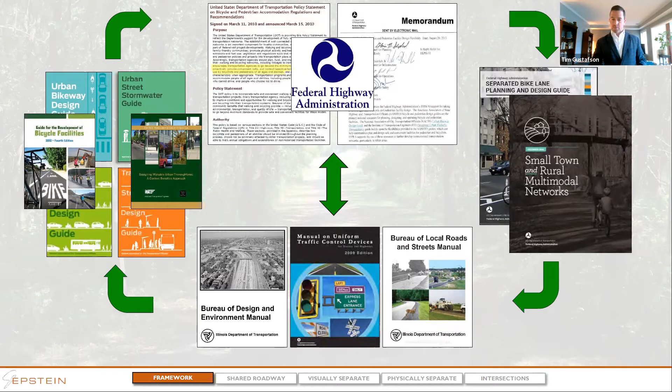So I want you to feel that after today's presentation, you know which guides are out there and how they're all relating to one another. Now I'd like to move on to some IDOT specific policy, which gets you a little bit deeper into the guidance to talk about where do we even start when it comes to selecting a facility.

For those of you who have cracked open these manuals, I hope many of you are at least curious, I use these all the time. I'm opening them probably 3 to 5 times a week. You'll see that the location of the facility guidance is in 2 different locations depending on which guide you're using. If you're looking in the BDE manual, you'll find this in chapter 17. And if you're looking in Local Roads and Streets, you'll find it in chapter 42.

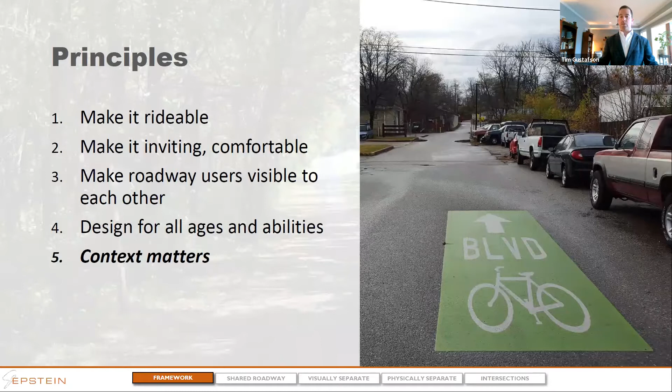The final principle is that it's really important to understand the context in which you are operating. Context is a very important consideration because different bicyclists and roadway users approach the network differently based on how confident they are, how enthused they are, and what their age and familiarity with the roadway happens to be.

For those of you in the engineering world, you may have heard of level of service, which rates roadways and intersections based on delay and capacity. Level of traffic stress is a different mechanism that rates the roadway from the perspective of the bicyclist, based on how comfortable they may be.

These factors can be used to calculate and estimate a level of traffic stress that rates roadways on a scale of 1 to 4. Level of traffic stress 1 is our lowest stress - think of a cul-de-sac in a very quiet neighborhood, a trail that's nice and easy for everyone to ride on, and even some protected bicycle facilities where you'd feel comfortable riding with your family. Levels 2 and 3 are next.

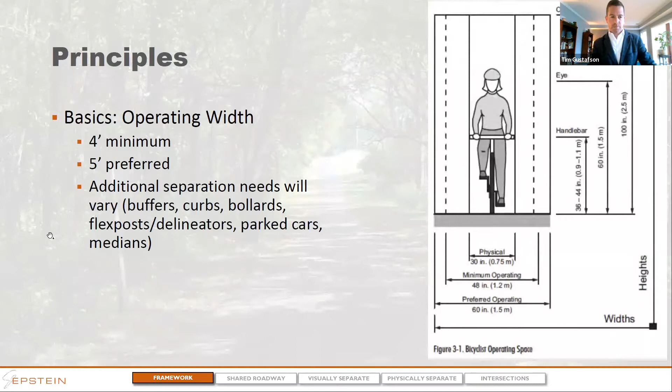When you have a little bit higher speeds or volumes, it actually makes sense to dedicate some exclusive space. That's where you start to see bike lanes or buffers entered into the conversation, because maybe just a little bit of visual separation is really all you need, and then the roadway just works better for everybody. And then obviously when speeds and volumes are higher, or when you're alongside of a highway, for example, you really do need that physical separation. That's when you introduce a curb or a vertical element to physically separate users from one another.

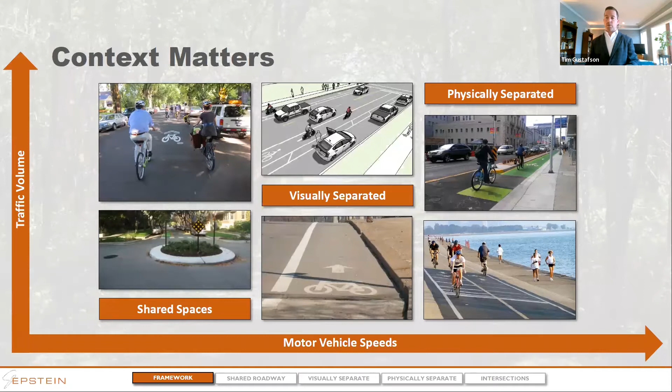So does anybody have any questions on what those 3 groups are before I go on to this? We've got shared roadway spaces, visually separated spaces, and physically separated spaces. And as you'll see at the bottom of the screen, you can tell which section we're in based on which element is highlighted. Okay, seeing no Q&A, I'm going to move on.

Our first group is shared roadway environments. So we have 4 that we're going to get into, and I'm going to define each of these for you, and you may be familiar with most of them already.

The first is a signed bike route. This is probably your most basic roadway treatment. Any roadway, unless we've specifically prohibited bicyclists from entering, like an interstate, legally can accommodate bicyclists. But context matters, and if we want people to feel comfortable and visible, we need to do things to make that happen.

One of the first low-level things you can do is identify the bike route. There are a couple of different ways to do this. These generally work well on roads at or below 25 miles an hour with average daily traffic of 1,000 vehicles or less. I'd even say you could get away with it on roads with 2,500 vehicles or less, depending on speed. This formalizes the presence of bicyclists in the roadway, so they know the best way to get to a destination using these low stress, low speed, low volume roads.

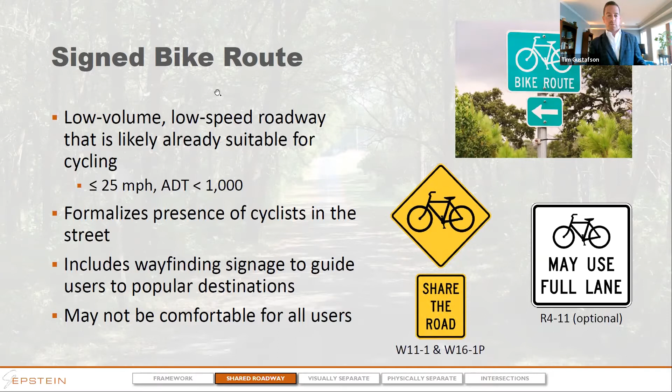However, signed bike routes are not super comfortable for everybody. You wouldn't necessarily feel comfortable going on a family bike ride if all you had was a shared roadway. So the next level up is installing a bit more guidance on the roadway, known as the marked shared lane.

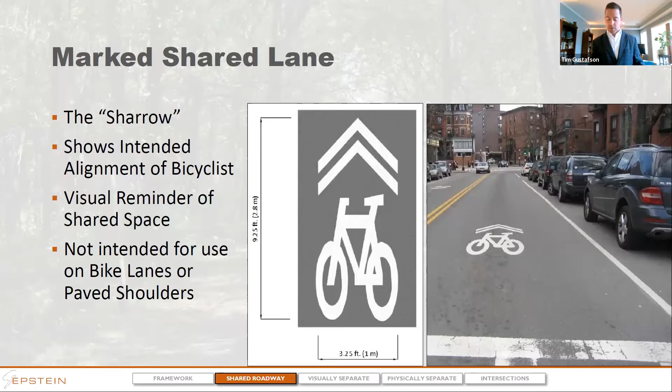Here's some additional guidance on placement. Generally, you place the shared lane marking 4 feet from the face of curb on a roadway with no on-street parking, or 11 feet from face of curb where there is. AASHTO, the BDE, and local roads guidance occasionally send you to AASHTO for further direction.

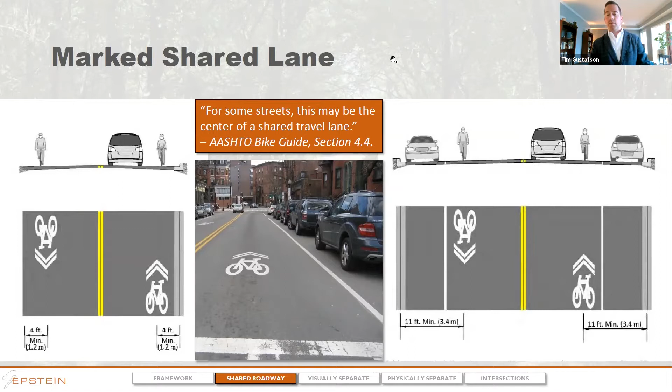AASHTO even states that on some streets, it's recommended to place the sharrow in the middle of the lane, especially in a tight section with on-street parking—you want to get the bicyclist out of the door zone and claim the roadway for that stretch. I've worked on a project with roadways where we couldn't place it 4 feet from face of curb or edge of pavement, and IDOT said center placement is probably recommended because it's more visible. So there are conditions where placing the marking in the center of the lane is not only logical but actually recommended by AASHTO.

The next level up from that is known as the bike boulevard. The bike boulevard isn't necessarily one specific treatment, but rather a connection of treatments. It takes the concept of a signed route and elevates it by pairing it with traffic calming and pavement markings to stitch together a network that is low stress, gets you to your destinations, and provides the added comfort and visibility we want on our bicycle networks.

We can even incorporate some regulatory signage to close off certain stretches of a network to make sure that bicyclists may be able to continue through along with pedestrians, but it doesn't necessarily turn into a raceway for motors.

So as I mentioned, this is a couple of treatments, but it's intended to be a roadway that prioritizes bicycle traffic. It does so by using traffic calming techniques to keep motor speeds and volumes below a certain threshold. Generally we like this to be below 3,000 cars a day, and at or below 25 miles per hour. If you can get it even lower, it's preferred.

These are great because they often can be built alongside or within a reasonable distance of an otherwise direct but very stressful and busy route. This helps you maintain your connectivity without having to go to bat or have a huge fight over a roadway that's already very full, very fast, very congested, and where you don't necessarily feel comfortable introducing bicyclists into that mix.

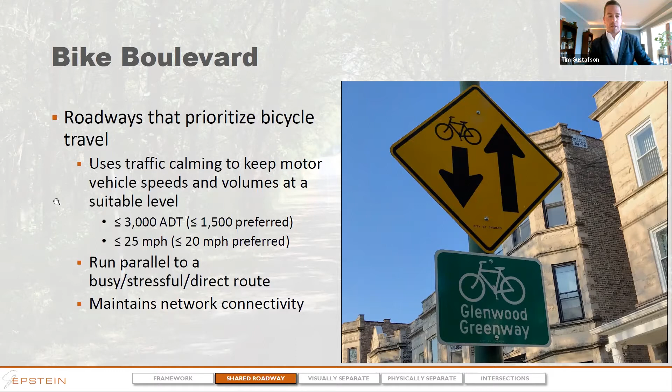Hey Tim, do you have recommended traffic calming measures that might be better than some others? Or, when you're designing these, for instance, a lot of times for neighborhood traffic calming people use things like speed tables. But for a bicyclist, how would you modify that to be as bike friendly as possible in the implementation?

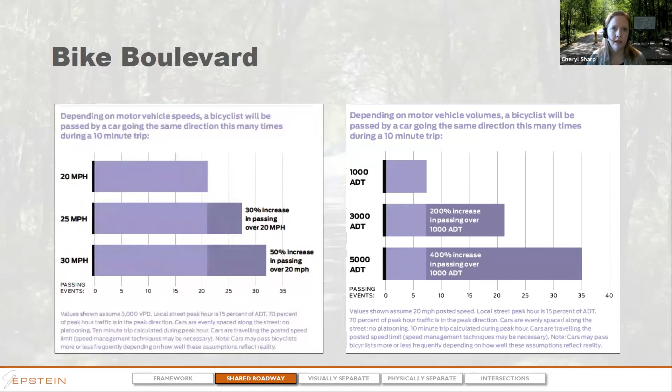That's a great question, and it actually has come up a lot. We had a recent project where we took the toolbox to the community and said, here's what all of these things do. Which ones do you like? Which ones don't you like and why?

What we found is that generally pavement markings are pretty readily accepted. People kind of get that they're helpful. Signage is really helpful too. There are some traffic calming techniques that are more popular than others.

Miniature traffic circles, which are literally only about 11 to 18 feet in diameter in the intersection at two intersecting residential streets, are a little bit more accepted and quite popular here in Chicago because they don't impose any kind of flow or speed restriction other than making you shift laterally to go through an intersection. So it slows you down a little bit, but it doesn't damage your car, unless you smack right into the thing.

What I will say is people generally don't like speed humps and tables. They complain that garbage trucks don't like them, ambulances don't like them, and motorists who want to go above 25 miles an hour don't like them because they're really effective, but they're also kind of hard to swallow.

So that's a situation where if you truly feel you need to reduce speeds, there's a newer design known as a sinusoidal hump. If you're going over it at the speed you should be, bicyclists can do it, motorists can do it, and it doesn't work against you. But if you go above a certain speed, it's kind of an auto-punishment situation where you really brought it on yourself.

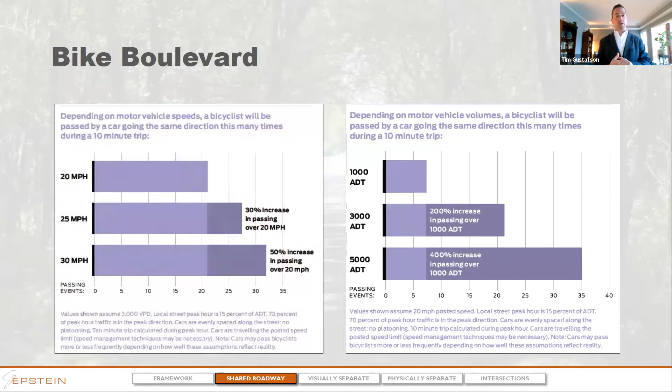If there's an increase in passing, the number of times a motorist overtakes you or the speed at which they do so contributes to that stress level. Stress levels start to go back up above these thresholds, and you can see an increase in the number of passing events or the speed at which that passing occurs based on that increase in posted speed or ADT. NACTO's website has a great module on bike boulevards specifically and goes into a lot of the data behind why we recommend certain speeds and treatments and what the benefits can be.

Generally, as Cheryl alluded to, there's a couple of different things you can do in a bike boulevard. You can either regulate speed, regulate volume, or do things that do both. Here's a couple of examples.

Sometimes just reducing lane widths will help calm traffic. If you calm traffic and reduce speeds where it's shared, that might work in your favor rather than giving space to bicyclists by making the roadway wider. Sometimes it's not feasible to widen your roadway. So as I mentioned before, a speed hump or table, a miniature traffic circle, a curb extension, or introducing an island into the roadway so cars split around both sides, slows everybody down. Those are some speed treatments you can use.

Let's say you want to reduce the volume of traffic through a certain area. You can reconfigure the roadway lanes, for example. Sometimes it's known as a road diet, where you take 4 lanes, restripe, and now you have 3, room for a bike lane. It's not a bike boulevard treatment per se, but it's one type of treatment.

Adding or removing on-street parking is another option. I live on a street where 2 vehicles cannot comfortably pass one another because there's on-street parking on both sides. The City of Chicago prefers it that way. Otherwise, all of these roadways would have speeding problems.

Sometimes changing your signal timing so that if you're speeding, you're going to meet every red light, and you'll find out that's just not a desirable street to drive on. And sometimes putting in a cul-de-sac or diverter where bicyclists and pedestrians can go through, but cars cannot. That's a pretty typical and increasingly popular approach, especially if you're closing off a grid that's got more than enough alternatives.

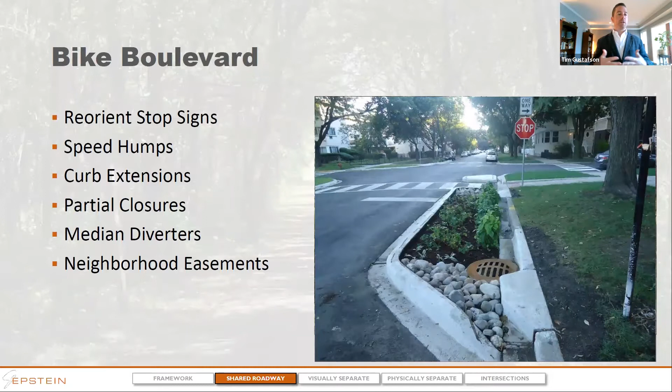Sometimes these are imposed in neighborhoods where flooding was more of a concern, and it just also happened to have a bike boulevard benefit. This is a situation in Chicago, but we've also worked in a city in Wisconsin where they had a stormwater utility ordinance and needed to reduce stormwater. They decided to put their bike boulevard network into that concept, with the city engineer working on the stormwater side as well as the bike plan side, getting these projects to work together.

So that was the introduction to the bike boulevard. Now I want to move on to a topic that's a little bit newer, relatively recent, only added since the Federal Highway Administration released its Small Town and Rural Multimodal Networks Guide, and recently added as an experimental treatment per the MUTCD. It's known as the advisory bike lane, the advisory shoulder, or the dash bike lane. I'll admit the reason it's still experimental is because there's still not even consensus on what we're supposed to call it based on how it's being used.

Generally, this is a situation where you don't have enough room on the roadway for an exclusive bike lane, or you still need a shoulder because you're dealing with a rural roadway and have breakdowns and other curbside uses that require a shoulder. You can't exclusively sign it as a bike lane if you also need it to be a shoulder. So in this situation, AASHTO recommends that if you have at least a 14-foot-wide lane, but you don't have enough room for other things, you're going to need to impose what's known as an advisory bike lane or advisory shoulder.

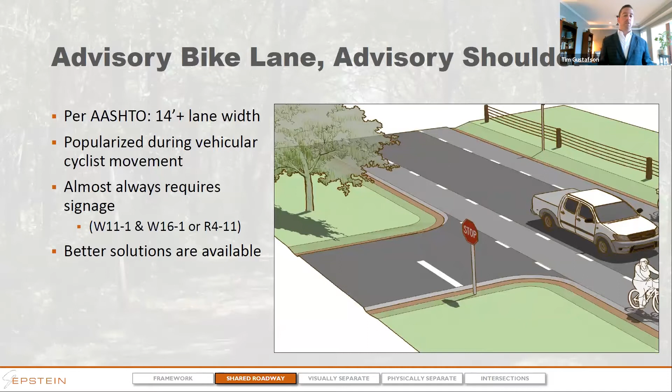This was popularized during the vehicular cyclist movement because we wanted there to be somewhere on the roadway for bicyclists to travel, but we couldn't designate it as exclusive. This is still a kind of evolving treatment where you need regulatory and warning signage to let people know what's going on. Let me move to the next slides because this explains it a bit more.

You've got a 2-way travel lane, the center of which may not be wide enough for 2-way traffic as currently signed. That's why the shoulder or bike lane is dashed, because when you're passing a bicyclist, you'll go around them using the center travel lane. If you're passing an approaching motorist and there's no bicyclist present, both of you move over into the shoulder because there's enough effective width to pass.

It requires that you do not stripe the center line, and you only would want to pursue this in a low speed, low volume environment where you want to narrow the lanes, give some semi-exclusive space at the shoulder for bicycling, and give everybody enough regulatory signage so they understand what's expected of them. It's a permissive broken lane line.

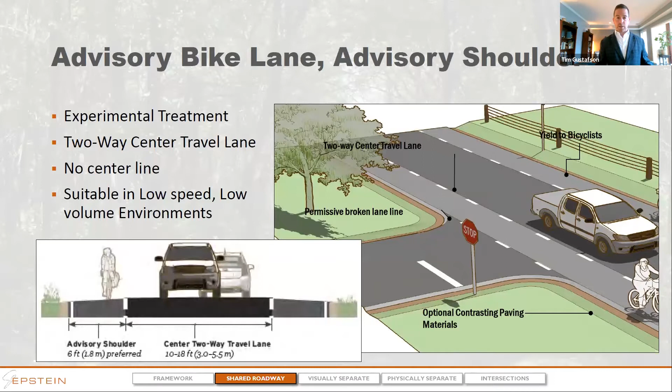This image shows contrasting pavement. We don't see that as much, but there are some examples I'm going to show on the next slide that do, because they have roadways where they want to provide that guidance, provide that facility, but there's not enough room to make it a solid lane line because there's just not enough effective width.

Here's a couple of examples. Upper right, we see Bloomington, Indiana. They decided to do this on a low volume roadway because they needed traffic calming and wanted to provide space for all these users. This example still included a sidewalk, so you've got your advisory shoulder, your sidewalk, and you can even see some people walking in that advisory shoulder. Not how it was intended, but not the end of the world because it's a very low speed environment.

Contrast that with the city of Chicago, which started doing 9.5 foot or 9 foot travel lanes, next to which they would place an advisory bike lane. This is done in the presence of on-street parking, transit, and two-way traffic, where they knew they needed to provide better guidance than a sharrow could give, but with very constrained widths. So they've got 9 foot travel lanes and a 5 foot bike lane - that's the 14 foot envelope we were talking about, just split up differently than we're used to.

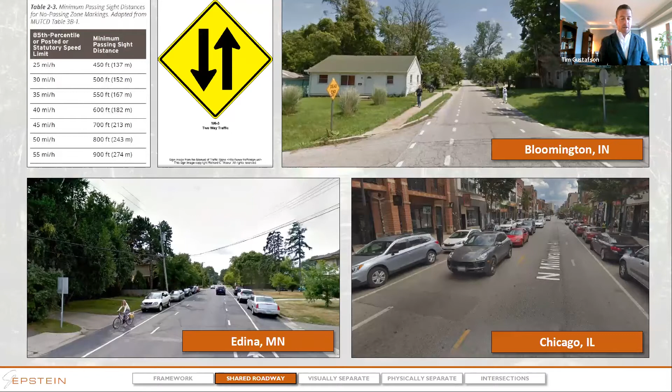In Minnesota, this example shows the presence of on-street parking. I'm going to guess - I haven't actually visited this one - that later down the road, when the on-street parking goes away, there's enough room for a bike lane, but not through this stretch. They didn't want to drop the bike lane and go to a sharrow; they wanted to give better guidance. So the bicyclist coming towards you in the foreground has moved back over into the bike lane or parking lane, because that's where she feels more comfortable, and the facility communicates that to everybody using the roadway.

As I mentioned, this is an experimental treatment. I strongly recommend using this two-way traffic warning sign so people know this is not just a one-lane road, but that you'll expect users in both directions.

So that's the end of the shared lane or shared roadway environments. Are there any questions, Cheryl, in the chat that I missed? At this time, no.

Okay, so now let's move on to visual separation. This is a situation where you do have the space and you do want to visually separate users to give them a little more visibility with one another, a little more comfort, and a little more safety. There are 4 that fall into this category: the wide shoulder, your typical bike lane, buffered bike lane, and the contraflow bike lane.

So wide paved shoulders - we're probably very familiar with these, but I want to give you a little guidance on how they're designed so you can see how they operate. Some roadways still need to have shoulders, but just because they're shoulders doesn't mean bicyclists can't use them. As I said in the advisory shoulder section, if they still need to operate as shoulders, that's why you won't see a bike lane sign added to them.

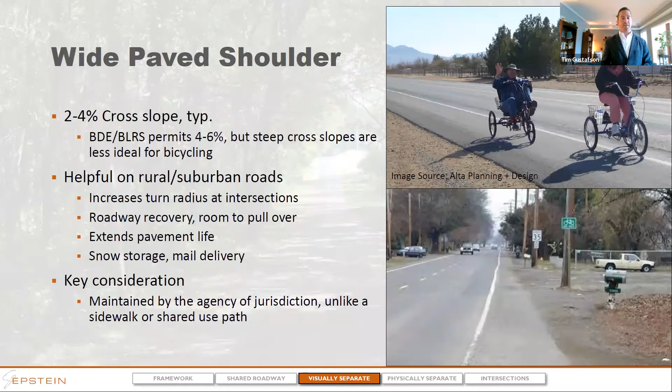So paved shoulders have a lot of benefits, not just for bicycling, but if you're going to use them for bicycling, there's a couple of considerations, like the shoulder should get plowed and swept along with the roadway. This can help make sure that it stays clear for bicycling throughout the year.

Now, there's another thing I usually like to touch on. If you're dealing with these rural roadways, there's a chance that you may have design guidelines that require you use rumble strips, or there's a desire to do so. But what I like to say is rumble strips by themselves are not a bike design element. But if they are on your roadway and you are adding shoulders and you think you need rumble strips, then there is guidance for how many times you want to put a break in those so that a bicyclist can enter and exit as needed to make evasive maneuvers, go around roadkill, things of that nature.

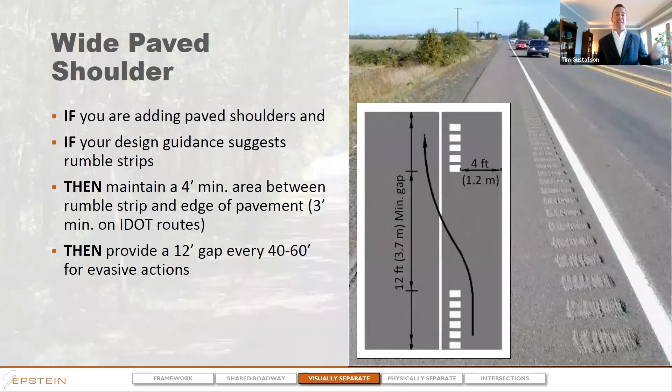So they recommend that you maintain a clear space of 4 feet beyond the rumble strip and the edge of pavement, so it's still rideable. And then you provide a gap every 40 to 60 feet. This image kind of shows you where that would go so that you could enter into and out of the bike lane. The rumble strips also do a really good job of making sure that motorists don't encroach on that comfort space, because it makes things unpleasant for them. And you get a visual cue a couple hundred feet back that someone's doing that.

So then we'll upgrade to the next one, conventional bike lane. This one I think is pretty well understood. It's dedicated space for exclusive use by bicycling, and it needs to be at least 4 feet wide to the edge of pavement, or 5 feet to the face of curb. NACTO recommends 6. Again, 6 is just a lot easier.

And as we're finding when reallocating roadway space, if you're converting one or more travel lanes, you end up liking to work in pretty even numbers. So let's say you've got a 10-foot travel lane, take that out and you've got a 4-foot buffer and a 6-foot bike lane. Your lane lines didn't move, you just reassigned kind of an added one.

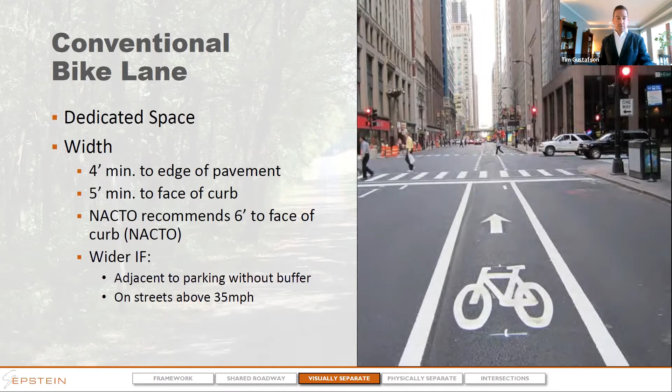You're going to need wider widths if you're adjacent to parking that doesn't have a buffer, or if you're on streets with posted speeds above 35 miles per hour. Michigan DOT, especially in the Detroit metro area, has 12-foot lanes everywhere, multiple lanes on a given highway. They actually had to do a 6-foot buffer and a 6-foot bike lane because they were replacing 12 feet of space.

The required elements per MUTCD are a 6-inch edge line adjacent to the travel lane, separating other moving vehicles, and then you need the bike lane symbol.

Optional additions include an extra line between the edge of the bike lane and the parking lane, or the edge of pavement. Generally, if we have on-street parking, we like to stripe it to make that very clear. You can also add signs to supplement the pavement marking. The bike lane sign itself, black and white, is not required. Often you'll see it when it's the first bike lane in town, but it doesn't necessarily do anything beyond making clear that this regulatory guidance exists and there's an exclusive bike lane on the roadway.

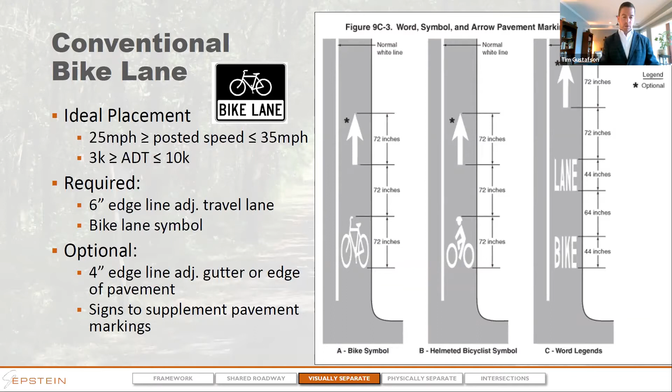Now, if you have space above and beyond that—I've been talking about buffers a lot—buffered bike lanes actually do a really good job giving added comfort, safety, and visibility, because you can add a bit more space between roadway users, bicyclists, and parked cars. If you have space to add a buffer, you need at least 1.5 feet. Typically we'll see a 2-foot or 3-foot buffer.

In the City of Chicago, when we do a 2 or 3-foot buffer, we start adding hatches, so it's very clear it's not a double white line or some odd pavement marking. We do that at a 30 or 45-degree angle, spaced every 20 feet or so. We usually say your hatch spacing can typically just match your posted speed—so 20 mph posted speed or 30 mph, space them at 20 or 30 feet.

The question often comes up, even in the planning phase, which side do you put the buffer on? Do you put it on the travel side, or the parking side? Sometimes if you have space, you can put it on both.

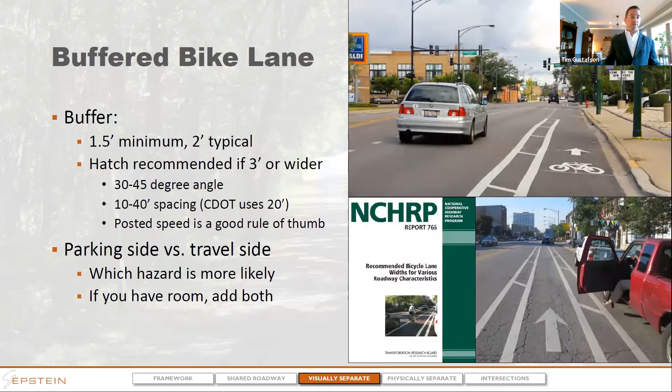The general guidance, which you can get from NCHRP or just based on measuring widths, passing distances, and compliance, is to put your buffer on whichever side of the bike lane you think the hazard is bigger. If there's lots of car doors opening and closing, put it on the parking lane side. If you have trucks and buses passing on the left, put it on the left. And if you have the space, putting it on both is ideal.

As I mentioned, sometimes if you're just reconfiguring a roadway, this helps organize the space so you're not creating a no man's land or an extra wide lane that encourages speeding. This example in New England—actually New Hampshire—they were taking one of the travel lanes and recognized they had 10 feet, so 4 and 6: a 6-foot bike lane, 4-foot buffer. This allowed the center line and travel lane line to stay where they were before; they just had 2 lanes instead of 4.

This was a really low speed, low volume roadway. They wanted to discourage speeding on the rare occasions it happened. So by adding the bike lanes, they made sure motorists only had 1 lane to work with, reducing speeds, reducing crashes, and generally organizing that space.

Buffered bike lanes also function to accommodate heavy vehicles without making a 12-foot lane look extra wide for everybody else—I'll show that on the next slide. This buffer helps organize everything, placing people in the center of their lane, accounting for mirror overhangs, car doors, and things of that nature.

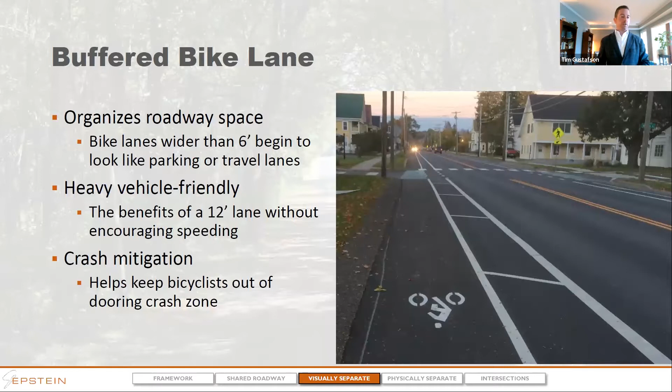Am I at 3 feet? Am I at 2 feet, 2'9"? So if you add a buffer, by reallocating the same exact roadway space, you can ensure that passing distance without everybody having to do math while driving. Here's a situation where you've increased that comfort without doing anything else to the roadway. This is why I think buffered bike lanes are so beneficial—they go a long way toward increasing comfort and safety without a lot of added cost.

So the next item I want to talk about is the contraflow. Contraflow sounds more complicated than it is, but the contraflow bike lane is a great facility solution that can help accommodate what was previously wrong-way riding. So if you have a city with a lot of one-way streets, but bicyclists don't feel comfortable going the long way around, or that long way around is really unpleasant, maybe changing how your roadway operates is a better solution after all.

If you're going to do this, the required elements are: you definitely need a double yellow line on your roadway, or in some cases a dashed yellow because you could still cross. And then you have to install signs like 'one way except bikes,' so it's very clear. This is from a regulatory perspective so that you can actually enforce these behaviors if you're seeing people do things you don't want. You'll want to add the bike lane symbol or the word, just like we did on a regular bike lane.

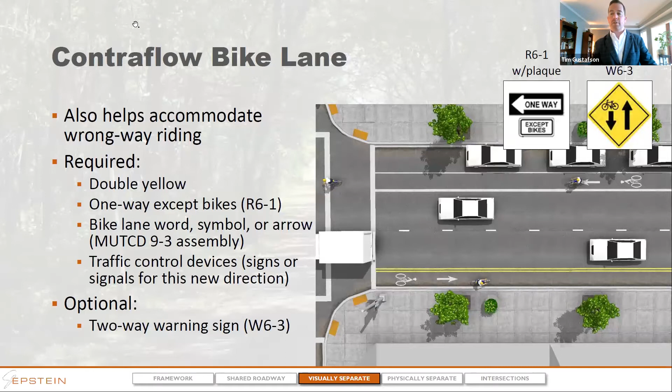And then we're going to want to install traffic control devices like stop signs and yield signs, because now you have people traveling in a direction on that roadway where they weren't previously, so they're going to need all new regulation signs. And then you can add the two-way warning sign, which I actually recommend, especially if it's the first time in a city, or the first time a motorist would be encountering bicyclists traveling in the opposite direction. But at the end of the day, contraflow bike lanes are basically just two-way streets.

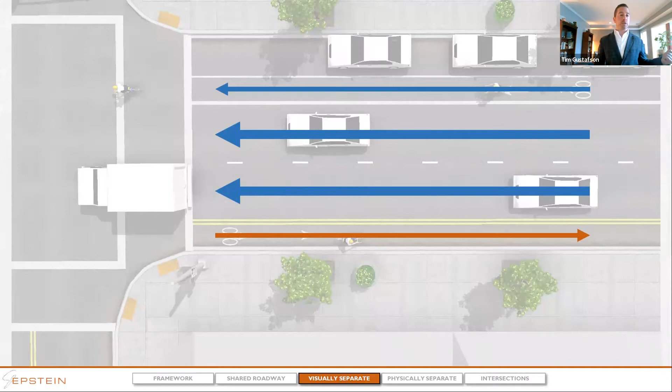They're just two-way streets for one user group. So rather than thinking about them as a special treatment, think of it as needing to allow two-way movement for bicycles while keeping it one way for cars. This can be done in the form of a shared lane in the same direction as motorized vehicles, and a contraflow lane just for bikes in the other direction. If you don't have the space to do that, that's an option as well. So now we're starting to mix and match shared lanes with traffic and contraflow lanes against traffic.

So I know I went through the visual separation pretty quickly. Are there any questions, or anything you wanted me to go into some additional detail on? I wrote a list of a couple things here, if you don't mind going into.

Absolutely. So can you elaborate on the importance of accommodating bicyclists at intersections, not just segments? For instance, we talk about accommodating them on the shoulder. What happens when you get to the intersection then? Do they go from the shoulder onto a shared lane? What is the best way to accommodate that? It's great if you can accommodate people on a bike lane or buffered bike lane, but it doesn't really lower their level of stress unless you take care of them at the intersection. So can you elaborate on that a little bit?

Yeah, that's a great question. And I've dedicated an entire module to that because people always bring that up. So I like to get people comfortable with their mid-block understanding first, and then I show them what happens at the intersection.

Because for far too long, and I still struggle with this on some of our designs, you run out of space at the intersection and you kind of do a facility drop, which is the worst place to strand a bicyclist and subject them to motorists who are now wondering where these people are coming from. So when we get into that module, remind me to touch on each of these so you can remind me about the shoulder, for example. I'll give that example here because I know it's at the front of everyone's mind.

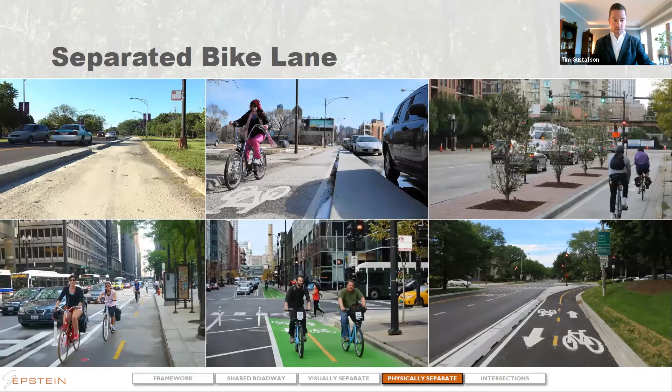This is a situation where you put a physical element in there that helps separate the bicyclist from everything else. This can be done through the use of on-street parking, through the use of a barrier curb, as you see in some of these examples, or with a mountable curb. You don't necessarily need it to be an impenetrable force preventing cars from encroaching upon it; sometimes just putting in a mountable curb is enough.

Sometimes we're starting to see bumps in the roadway that are mountable but much lower. You can use a median or planters, and you can even use flexible delineators, but I put an asterisk next to this because flex posts, these flexible delineators, are kind of like a glorified buffer as far as I'm concerned.

So they do a pretty good job, but I would really recommend if you truly want that comfort, you want to put in something a little bit more robust than that.

A lot of people say, well, where is this in the MUTCD? Most of what we're talking about is after you've done your pavement markings, which are under the purview of the MUTCD; you're actually dealing with curbs and geometry. So it's not something you'd necessarily go to the MUTCD for. There's even a section that reminds everybody it's not a traffic control device, so the MUTCD doesn't really say anything about it. It doesn't say no, but it also doesn't give you the guidance you're looking for.

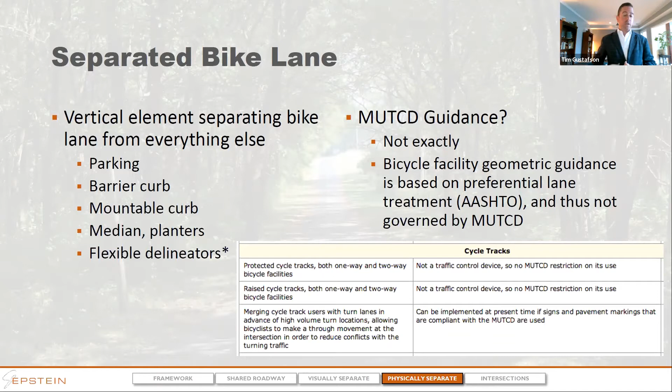So that's where I say go to other resources. One of the best ones out there is the one FHWA put together, the Separated Bike Lane Planning and Design Guide, which is also free online. You can Google these terms and find a PDF without too much issue.

The reason I like this one is they give you a typical section, plus a plan view extension, and then show you a photographic example for a city that's done so. So you can see you can do all sorts of things with your separated bike lane.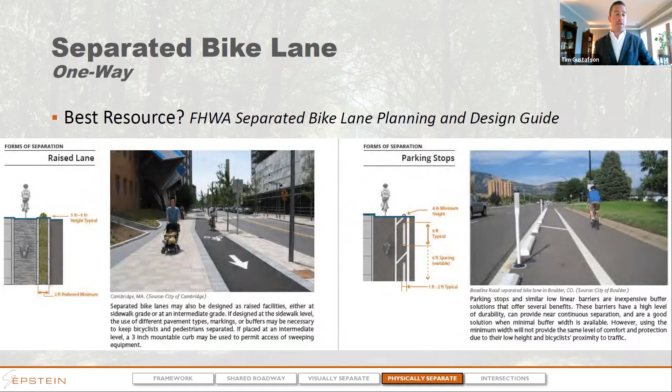I know a lot of people are concerned about maintenance, and obviously you still have to get a vehicle in here to sweep, which I'll show you in another slide regarding your effective width needs. But these do a great job of giving you that comfort you're looking for.

Looking at it from above, there's a bunch of things you want to consider when designing these, because if you're placing your bicyclists and bike lane back behind on-street parking, you're going to want to make sure your sight lines are working. So if you follow with me from left to right here on the screen, you'll see things highlighted in orange.

FHWA recommends keeping a clear sight triangle of 15 feet on the approach so that motorists can see bicyclists coming through the bike lane. Even though it's a one-way facility, we make a symmetrical sight triangle just because we want to be able to see in both directions no matter what.

Then on the street side, we pull the parking back about 20 feet from the curb, which more often than not you're doing anyway. You want to make sure you maintain that so you have visibility for motorists turning onto the side street and can see the bike lane before they make that move. You can do that with pavement markings or with a curb.

As I mentioned, curb versus pavement marking, it's up to you. Sometimes we do it first in pavement marking, and then 3 or 4 years later we come back and make it official by adding the curbs. That's a great way to try it out and see if it's working before you go through the added cost of adding and changing curbs.

Then on the right, which we show everywhere, you want to identify conflict zones. I'll talk about this more in the intersections module, but conflict zones have become the area where green pavement marking has come about. The use of green pavement marking has become commonly associated with bicycle facilities based on MUTCD, NACTO, and other guidance. So these conflict markings are marked with 2-foot bars spaced 4 feet center on center, or 6-foot bars spaced 8 feet center on center.

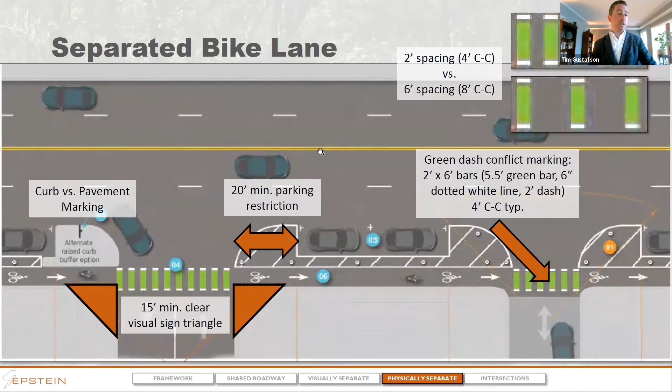Here's an example, also in the city of Evanston, of a protected bike lane. There's on-street parking behind the camera in this shot. Here's the clear zone we're marking approaching an intersection, and we use green to highlight the conflict zone at the intersection. This bike lane is actually transitioning back from behind parked cars to a traditional bike lane farther downstream.

That's not impossible, and it's not the end of the world to do so at the transition. Ideally it'd be better if you did it mid-block, but this isn't terrible from a design standpoint. Speeds are low enough, volumes are low enough, and everyone can see one another. We've daylighted and pulled that parking back so you can make that transition, because your roadway isn't going to be the same width everywhere.

In this condition, they went back to traditional on-street parking. This also happens to be in the presence of an elementary school, so that's why you see some crossing enhancements and things like that. This also happens to be a bus stop, so basically everything you can think of coming into the environment is here - on-street parking, transit, bikes, peds, school zone, everything. The city of Evanston still has this in effect and is continuing to monitor its performance. This shows an example of the protected bike lane approaching a conventional bike lane.

Now, I've talked about bike lane design from a general standpoint. I want to talk a little about the difference between one-way and two-way. A one-way bike lane does provide a high quality, low stress facility. It does require more space than a conventional bike lane, because now you're adding a buffer, and the buffer needs to be wider. It's adjacent to on-street parking, so you pull the parking back so you can see things a little better.

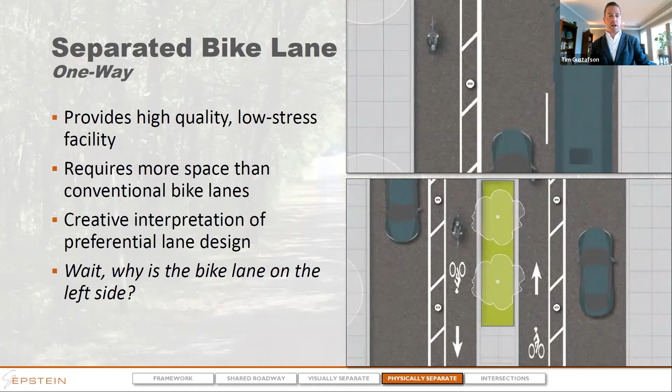As I mentioned when Cheryl brought this up earlier, the image at the bottom is actually showing a bike lane on the left side. The bike lane is on the left side because we're trying to get bicyclists away from a conflict situation. I know it's a bit of a leap to go from talking about left side bike lanes to two-way facilities. As mentioned before, a protected bike lane takes up more space than a buffered bike lane or even a conventional bike lane, but it really gives us that comfort we're looking for.

If you put two protected bike lanes next to each other, they share the same buffer, and effectively two one-way protected bike lanes on the same side of the street take up less space than one-way protected bike lanes on opposite sides of the street.

In North America, United States primarily, we're starting to see a lot of two-way bike facilities on a roadway, whether it's one-way or two-way. And Europe's designers were looking at us going, why the heck are you doing that? But more often than not, it was kind of replicating that side path experience we have on our trail network, and we're trying to find a way to make it work in an urban environment.

So we started to see these pop up in a lot of places. This allows you to install an 8 to 12 foot bikeway with a 3-foot buffer. You could effectively get this into 11 feet of space, although I definitely recommend 14 to 15. This allows you to share the buffer. You can protect it through the use of the curb, or you can use flexible delineators. This allows you to mark the bikeway as a 12, 10, or 8 foot lane, then do that 3-foot buffer for separation from other moving traffic.

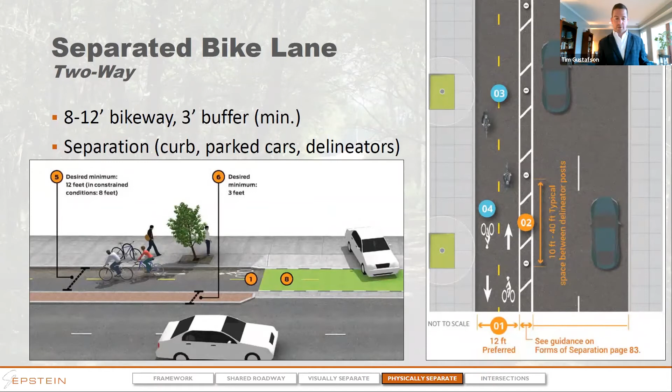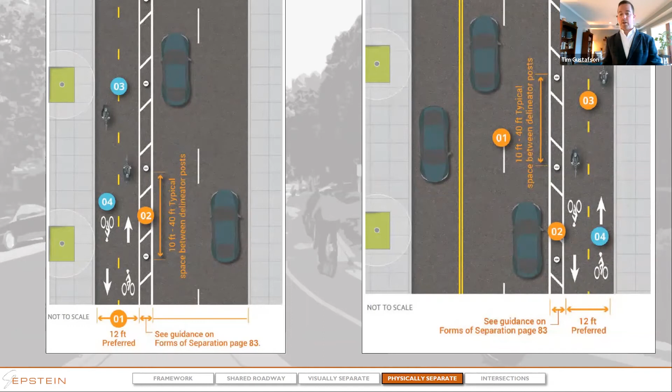This is really something that was born out of necessity. So if we decided we wanted to do two-way protected bike lanes, we needed to figure out how to make them work. This is some additional guidance from the FHWA separated bike lane planning and design guide, showing how far apart to space your flexible delineators, where to put your pavement markings, and then they go through the variations on this theme as it relates to a one-way roadway.

So we've introduced one-way for automobiles, two-way for bikes, but it's a little different than your contraflow because now you've got a two-way street next to a one-way street. So you need to think about the conflicts, which we'll get into a little bit more.

And on the right, you've got a two-way street with another two-way street next to it. We've just separated the user groups, and that is like the Evanston example I showed before. Dearborn is a one-way street in Chicago, but the bike lane is two-way. So we've got a lot of examples now around the country where we're learning how these work in each of these environments, because they're very different.

So I know I've jumped around a little bit. This is discussing the two-way bike lane facility and why we're doing them. But I want to get back to one-way facilities to explain an effective width example.

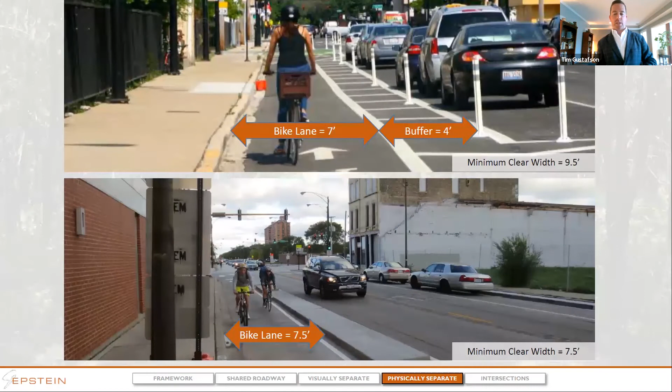As I mentioned, putting the buffer in and then putting the bike lane in gives you this really high quality facility. Put your flexible delineators or barriers on the outside edge, 1.5 feet from the traveled way, like all other streetscape elements or curbs. That's where you'd want to put it.

When you do this, make sure the effective overall width is big enough to plow or sweep, for example. In the city of Chicago, we definitely need to sweep and plow, so we wanted to make sure these were big enough to be maintained. In the image up top, you'll see we have a bike lane of 7 feet and a 4-foot buffer. We took an 11-foot travel lane and just reorganized it.

This allows a general city of Chicago street sand truck to get through, sweep it or plow it as needed. Down below, it's a little narrower because the city of Chicago has equipment that can sweep an area about 7.5 feet wide. Champaign was in the same boat, where they had campus snow clearance equipment. So these smaller Bobcat styles can get into those facilities and keep them clean or plowed in the winter.

So when you're thinking about your protected network, think about what kind of vehicles you're going to be using to plow, and then use that to adjust the lane and buffer widths you're used to using or allowed to use to meet your needs. And that's why we have guidelines, so that you're not just beholden to a single standard with no flexibility.

So here's a situation where you've got a couple of examples for how to do that, and this can be done whether the facility is one-way or two-way. That's why I jump around a little bit between the two-way facility and the one-way facility.

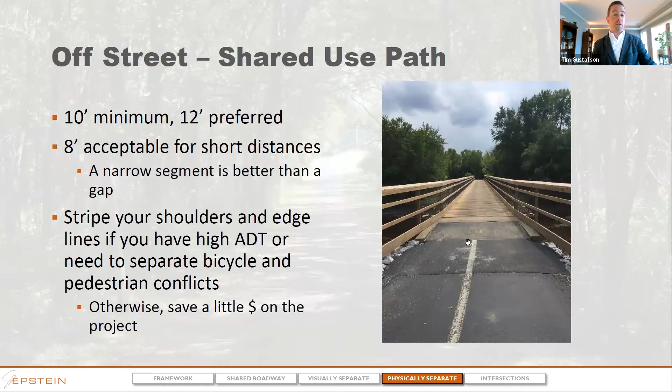Per AASHTO, BDE, local roads, everybody kind of agrees you want 10 feet minimum, 12 feet is better. Sometimes if you have significant physical constraints, you can go down to 8 because a narrow segment is better than nothing, but you do want to make sure you put signage and warnings about that condition. You can stripe your shoulders and edge lines if you have high ADT. I'd say don't bother with your center line - it's kind of assumed how it operates - but some agencies still want one, or maybe you do a center line approaching a bridge just to organize everybody a little, and that'll save you here and there.

This minimum width is based on where AASHTO says you need at least 10 feet, and then you need 2 feet of clear on either side before obstructions, signs, tree branches, or steep grades. So you can kind of see what your graded area needs to be.

1 to 6 is the max, and I recommend using that 1 to 6. I actually got comments on some concept geometry this morning from one of our subconsultants who does great QC on our work. They said use the max on the side slopes, especially if you don't want to take right of way. That can be graded, that can be clear zone, but doesn't necessarily need to taper off really gently and give you this big right of way taking.

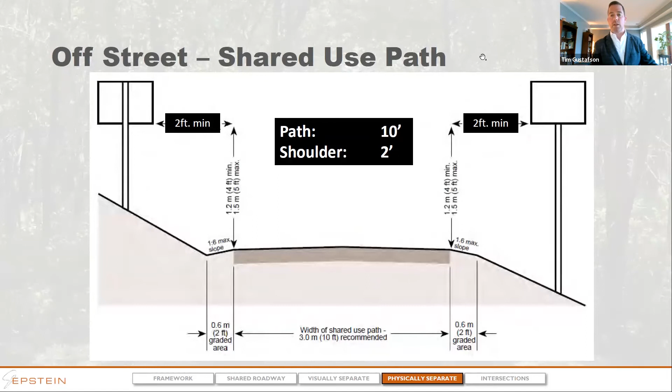So this gives you an idea of what your operating space needs to be. As I mentioned at the beginning of the presentation, sometimes you'll see the word side path uttered. This is because a side path is a shared use path within 5 feet of the face of curb, or a railroad or waterway edge. This is different because what you do at intersections will be different than a trail that's off in the middle of a forest preserve, for example. So AASHTO and IDOT recommend that 5 foot minimum separation from traffic.

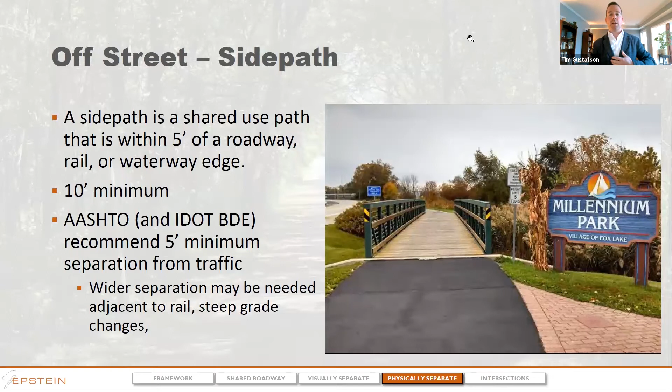The comment I got was it should be face of curb, not back of curb, so you get a little bit of wiggle room on where it goes. But you may also need to make that space wider if you're adjacent to a railroad - they get to call the shots on how much space they want - or with steep grades. AASHTO even has guidance on what your railing needs to be based on what slope you're adjacent to and how far down the run you need to go. I touch on it at a high level here, but generally this is what your envelope of space should be.

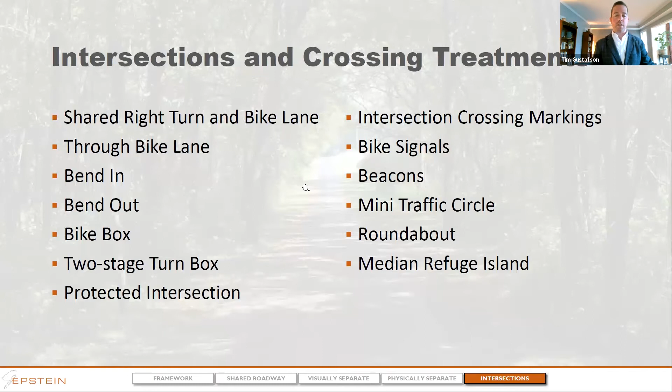I touch on that very quickly because what I want to get to is the intersections and the types of treatments you do when you're doing a crossing. There are a lot, and I want to get into each of these - we've got about 40 minutes, so hopefully we can give you good guidance on most of these. I'd say the least of which is the roundabout - I went lighter on that one because we don't have as many in Decatur, but if you have questions, you're certainly welcome to ask them.

So the first facility - I still consider this what I call a bike lane drop, which is not great, but it's better than nothing - is if you have an urban environment with turn lanes, you can make that a shared right turn lane and a bike lane. You can do this by placing a shared lane marking or a 'right turn only except bikes' sign in the roadway.

This places the bike lane within a right turn lane and doesn't require that you move over to the left or hug the curb, because you don't want bicyclists doing that. This will keep a bicyclist aligned in an urban environment to go through an intersection if that lane doesn't result in a lane drop, for example.

So here in this Chicago example, the roadway continues because there's on-street parking on the other side of the intersection. There's no reason to make the bicyclist move over, especially if you don't want people turning. You want to create this condition where you move the bicyclist to the left.

Sometimes you'll impose a no turn on red so that the car is not honking at a bicyclist while stopped at the intersection. This is kind of your first attempt to give them some facility guidance, even if you're not giving them their own facility.

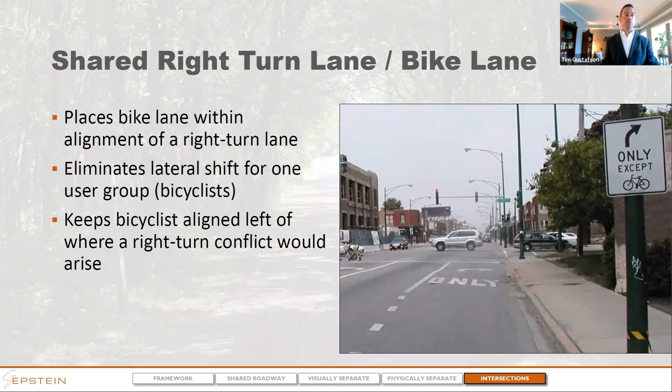This helps mitigate those conflicts, because if you've ever been in an intersection and a motorist tries to turn in front of you, it's known as a right hook crash, and you don't want to create a condition where that would happen. Here's a couple of examples on how you make that just a little bit better than making it a shared right turn lane.

You can put a shared lane marking in a turn lane, place that shared lane marking where you want the bicyclist to position themselves so they can get out of that conflict situation, so they'll be to the left of the motorist who's trying to turn right.

The 55th Street example down on the lower left is a slightly more complex approach, because what we have is a protected bike lane meeting a shared lane facility. You see the bike lane symbol, then it gives way to a shared lane symbol, then it gives way to a right turn arrow, spacing accordingly based on the posted speed and the approach to that right turn lane. The image on the right is just the use of a sharrow in a Montana city.

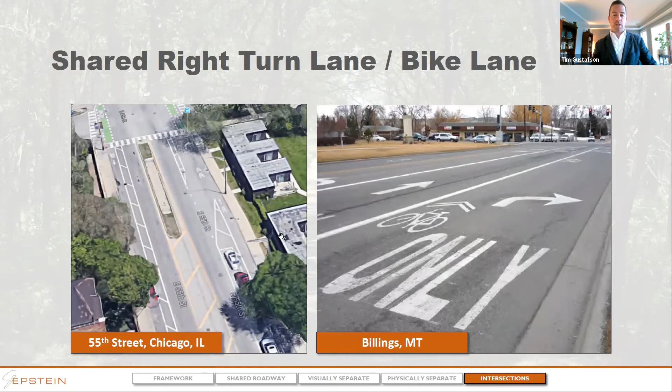Now this is a better top-down view of that 55th Street example that I showed, where you have a bike lane at the curb and then a right turn lane that appears where motorists are entering into the shared lane condition.

They're the ones making the lateral shift, and therefore they're the ones who are expected to yield upon entry to this shared facility. So in this situation, use the bicycle symbol to identify the intended position, and then the shared lane symbol in the shared environment.

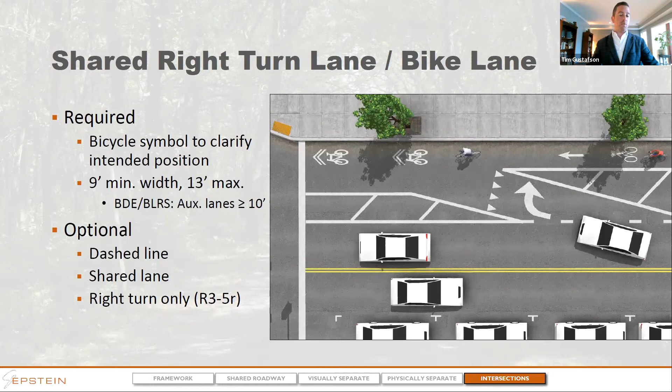That turn lane needs to be between 9 and 13. IDOT requires that it should be equal to or greater than 10. The optional treatments in this situation are the dashed line upon entry, the shared lane marking, and a right turn only regulatory sign if you feel it necessary.

But if you have a little bit more space approaching an intersection and you're not doing a lane drop, it's better to actually do a through bike lane. This can be done with or without green, but it's important because the bicyclist isn't expected to make a lateral shift. They're going straight on through an intersection.

They're able to hold their line in alignment, which keeps them more visible to motorists attempting to enter the turn lane. This channelizes those movements so that the motorist crosses over when there's space to do so before beginning to make a turn, so it's not a turning crash.

Side swipes in lower speed environments are prone to be less severe and less frequent. So if you're creating a condition, you're attempting to mitigate that risk by how you're designing this approach.

This is a situation where you can reduce that right hook conflict and clarify who's supposed to yield to whom, because again, the motorist is the only one that's making a shift. So you're required to put in your edge line and your bike lane symbol.

The optional treatments are your skip dash treatment. I recommend the right lane must turn right sign because that shows the beginning of the yield condition, and then the R4-4 shows the beginning of the shared crossover condition: begin right turn lane yield to bikes.

So again, your regulatory signage can accompany your pavement markings. I think that does a great job of making it very clear to the motorist that they are supposed to yield upon entry. And then, as I mentioned before, your green pavement is optional to show this conflict zone.

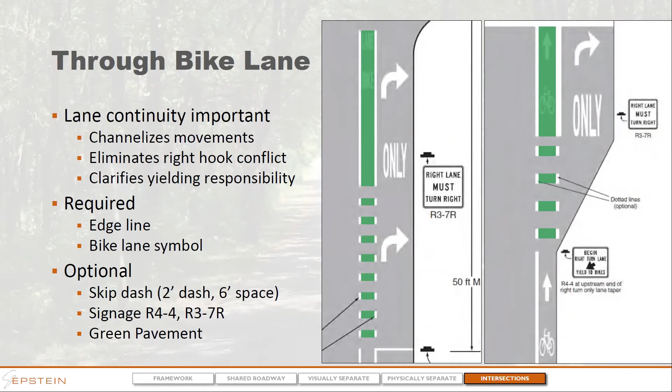That actually is something we're dealing with by trying to install a protected bike lane on the left side of a one-way street, because we're deciding between a shared through-left or signal separation. We're actually choosing signal separation because it's so much more robust and easily understood, so we're not in conflict with the MUTCD.

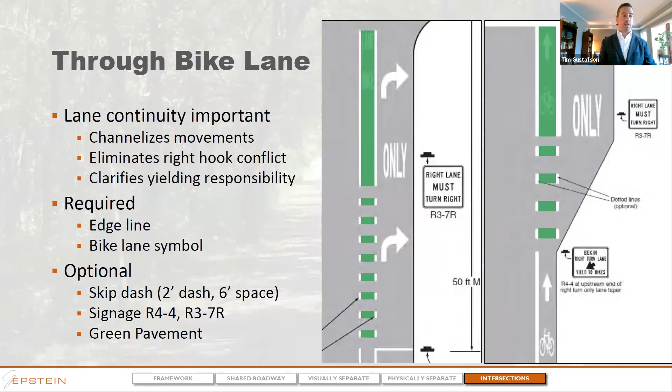Now, if you don't have that ability, or you've got a little more room because of your on-street parking, you do have the ability to do what's known as a bend in. This is where the bike lane bends in toward the travel lane, like the example Katie was asking about earlier, where you want to bring the bicyclist back into the sight line of the motorist and they're parallel to one another before a turn begins.

This brings everybody back together, kind of a shared lane environment. You see the use of this 'turning vehicles yield to bikes' sign. This will work in an example where you don't have a right turn lane, because as Cheryl mentioned, you cannot have a bike lane to the right of a right turn lane. You need to move them over.

So this is a shared lane environment where motorists must yield, and there's a chance there will be a motorist behind them wanting to go through. Not the best treatment, but it does work if you don't have a lot of turning volumes. Or let's say this is a T intersection and there's no turns at all—this would be a good treatment to use.

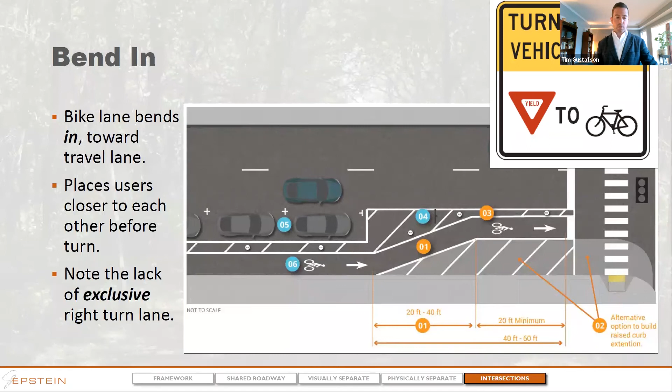A bend out is where we do kind of the opposite, where we actually bend the bike lane away from the travel lane. This might work because we've got a shared through and right, but now what we've done is created a physical separation again, kind of like a separated bike lane. If you look to see where the motorist making a turn is located and how much space we've created, that width can vary based on guidance.

You've created a space where the motorist has begun their turn—they've exited the travel lane but haven't yet crossed the bike lane. So you've created a pocket of storage that allows them to yield a second time without fear of a rear end or turning crash, but also allows them to yield so you don't have a turning bike crash at the crossing. This separates the automobile's turning movement from the bike crossing movement and allows independent yielding activity through the use of geometry. This works well.

Again, it's not an exclusive right turn lane, but it does work in urban environments where you want to give that space, while also ensuring motorists have the space and visibility to effectively yield at this crossing.

Sounded like there was a comment there for a second, Cheryl. You turned to a screen that I was going to ask you about—pros and cons for bend in versus bend out, which is the industry trending towards. Okay, so they're still being used.

So the pros and cons: the bend in takes up less space and doesn't involve any kind of curb. In the example I showed in Evanston, or the one Katie asked about, if volumes are low and speeds are low, the bend in actually works pretty well in that environment. You may need to pull out a parking space or two for sight lines, but it's not as robust as we were talking about. So it's lower cost but less robust—I'd say it's less common, but still certainly acceptable in some conditions.

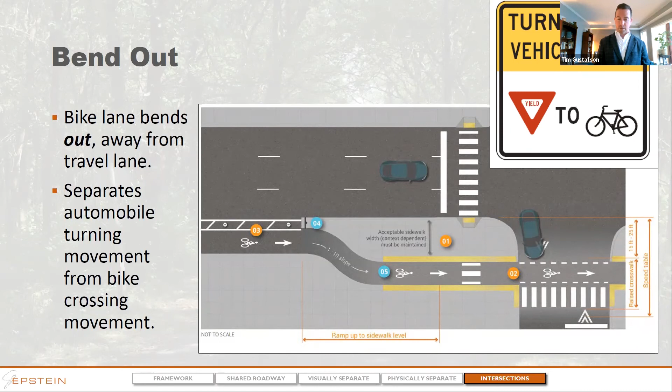Whereas the bend out does what I mentioned before: it allows the motorist to get out of the travel lane before interacting with the bicyclist, and, as you'll see in a moment, can also facilitate a two-stage turn for a bicyclist, which I'll get to shortly. If you do this with curb work, like I showed on this slide, that curb could be a refuge island for pedestrians. It can also function as a transit boarding island, so people getting on and off a bus wait on the platform and only cross the bike lane before boarding, not the bike lane and the travel lane. This has been used in the Evanston example.

But the cons for a bend out: it does take more space, and requires the use of a curb more often than not. And if you're going to do that bend out, don't put a whole bunch of stuff on that refuge that makes sightlines a problem—so be careful to do that.

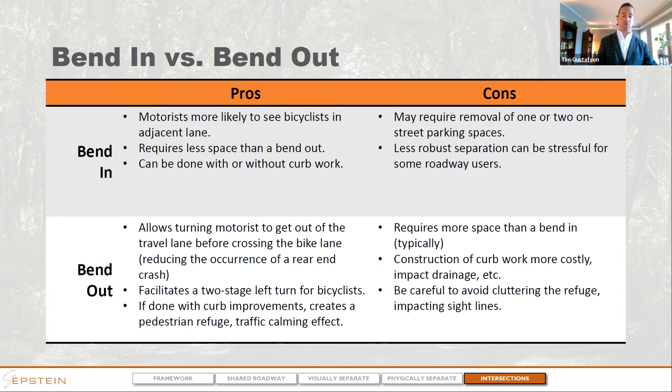So I mentioned a two-stage turn. I'm not quite there in my slide presentation, but I want to touch on something first to explain why I don't use this all that often.

Early in guidance, we started to learn about the concept of a bike box, which is actually just a setback stop bar or advanced stop bar, where we put pavement markings to say this will be a great place for bicyclists to queue when approaching an intersection that's almost always going to have a red light because the cross street is so much busier. These were originally used in environments where there was a left turn need, but not necessarily any other guidance. So if you're approaching a bike box on a red light, you can come to the stop bar, get up in front of motorists, and then go on the green and you're up front.

You can get into the lane more quickly. But if you're approaching it on a green light, you can't do that, because there's a chance you'll be trying to move laterally to the left and create a conflict you don't want to be part of. So this doesn't really facilitate left turns. If you're seeing bike boxes or discussing them, don't do them when you want to facilitate a left turn. And even as I say that, I'm going to introduce a condition where a bike box might actually work, but not in the way you might think.

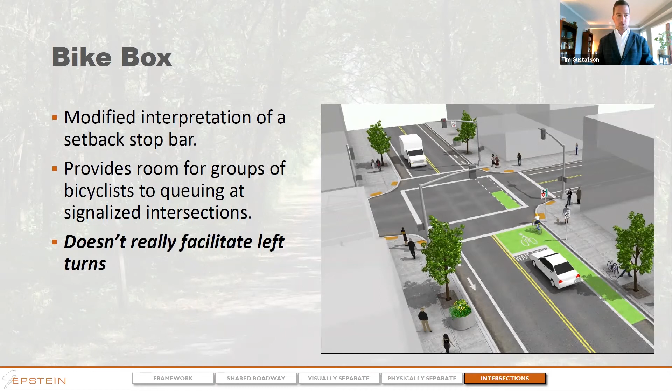So bike boxes are a tool that can allow for queuing at red lights, that allows a leading bike interval or a leading pedestrian interval to let a group of bicyclists get going before the motorist. But if you're not doing it for that purpose, stay tuned, because you might see it used for something slightly different. The reason I say that is because facilitating left turns at busy intersections is stressful.

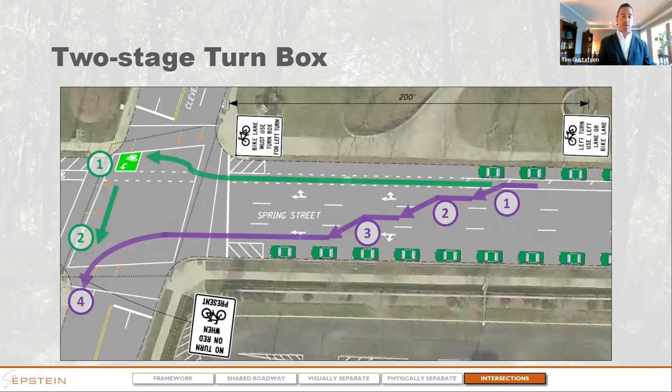And so the two-stage turn box actually came about because we wanted to legitimize this defensive movement. So a green pavement marking, known as the two-stage turn box, can be placed at the far side of an intersection, and you kind of go around the outside of the intersection to make your left turn rather than the inside.

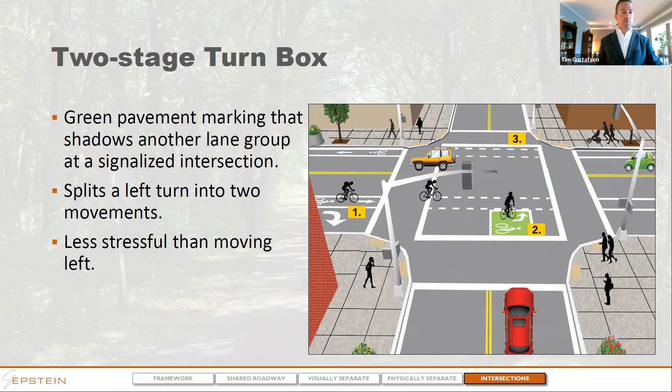And you'll see that this green pavement marking hangs out in the intersection, and it does so in an area that's not in conflict with any through movement on the bike lane or cross movement on the travel lane, because that cross movement has a red light. So in the MUTCD, this is an interim approval design treatment. Its guidance is still evolving.

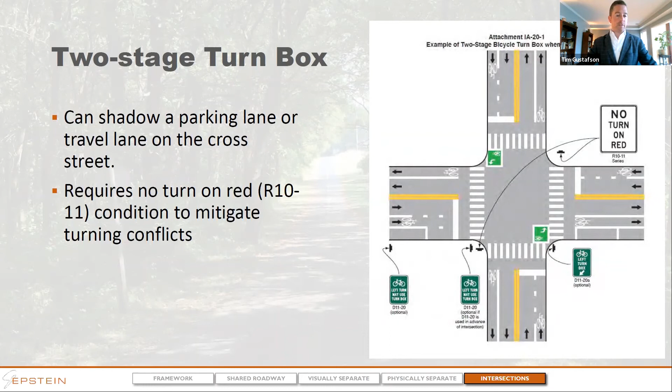The guidance does a really good job to say if you're going to do these, you can shadow the parking lane or the travel lane on the cross street, but you are required to impose a no turn on red requirement to make sure you don't have that turning conflict to mitigate those movements. This does a great job of legitimizing that defensive movement, because a bicyclist wants to make a kind of turn like this, but they want to get out of that conflict zone.

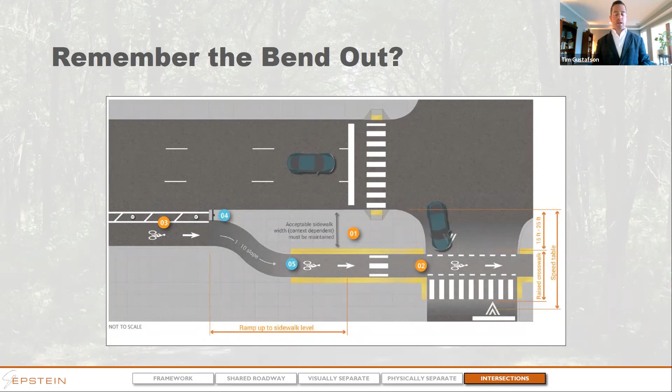This could have been introduced literally 40 years ago, but the vehicular cycling movement said, we don't want to do that. We don't want to do protected intersections. We want bikes on the street, so we're not going to do this.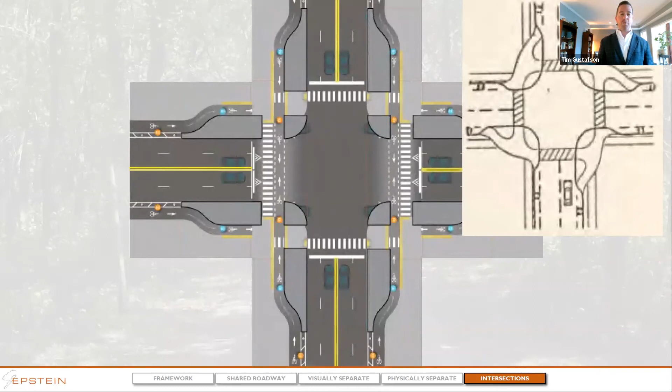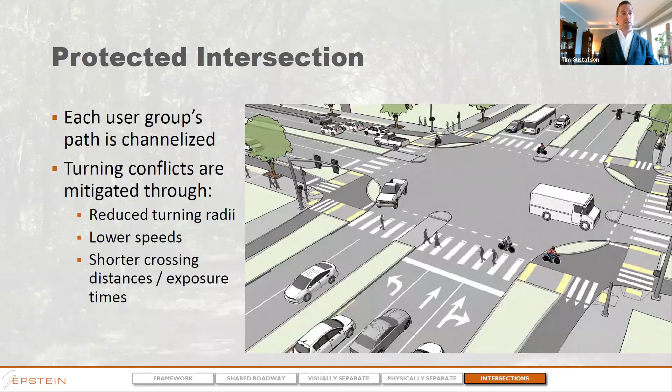So many years have elapsed, and we actually looked back at it and said, no, we should revisit that. The protected intersection kind of takes that defensive movement, channelized path, and imposes geometry upon it to really bring it to that level. So turning movements are mitigated, everybody gets their own facility, and it's designed in such a way that those crossings are very visible, easy, and they're the shortest distance that they need to be for all user groups.

This is that example I was talking about earlier, where even protecting part of your intersection can make a big difference. So this is Michigan Avenue in downtown Chicago at Millennium Park, approaching Randolph Street.

And that northbound to right turn movement, which a lot of bicyclists like to make because it goes to the lakefront trail, was constantly being bombarded by cars also wanting to cut that corner and basically just swooping into the bike lane to make that turn.

So the city took a look at this for an extended period and said, let me just stripe out what should be happening. Let me add a flex post or two, and let me prevent that from happening. Suddenly, the stress level for this intersection went way down for me. I now can bike up approaching it without feeling I'm going to be cut off by an Uber or a taxi or a passenger vehicle. And it didn't take a lot to do so.

I just want to point out the one custom regulatory sign they put at the intersection with the turn only lane and a bike turn only lane. Because this is a condition where there is no facility to move through for bicycling. And if you were that road warrior that wanted to continue north on Michigan Avenue, you would be to the left of the motorist at this point, and you would not be in the bike lane, because most people are wanting to turn right.

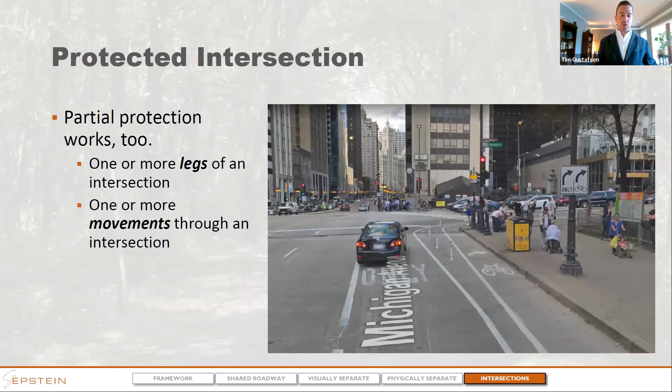Now, if you do want to go through an intersection and you want to give that guidance, you can also add markings through an intersection, especially when you want the motorist, the bicyclist, and all roadway users to hold their path across the intersection. Or maybe you do have an unfortunate jog in your network and you can't avoid it, so you can clarify and anchor these pathways. I'm going to show you a couple of examples where that's done.

They can be done with or without the use of green. As you probably notice in these slides, green kind of echoes where your white dashes are. And that's generally the best practice to make sure that everything's lining up and is as visible as possible.

But here's a couple of examples that were a little bit hairier that have been done over the years. Epstein did the design on the left, and the city of Chicago did their own design on the right, where we've got a six-way intersection. Everybody didn't know what was going on there, or you've got a jog. So these plans are kind of those in-progress construction documents that show you a lot more guidance on what to do with your pavement markings if you truly want to give that clarity through an intersection.

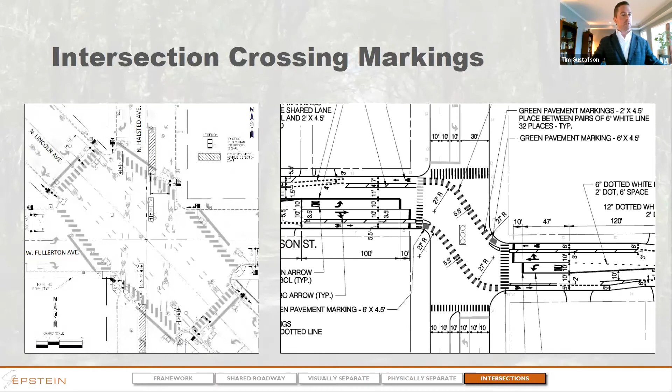And these are almost always custom, but as you'll see with the tons of callouts here on the screen, showing your width, your spacing, where it's located, what even your radius and your effective widths are. We dimension everything, sometimes while we're still figuring out as we go, just so that the reviewer, the city, the client can see kind of how this would get constructed.

If you don't want to do it with just pavement markings, or as we've alluded to, when you're placing your bike lane to the right of an exclusive turn lane, you can use bike signals. The interim guidance on bike signals requires that if you have this condition, a bike lane adjacent to an exclusive turn lane, you need to separate those movements through the use of a signal.

This exhibit shows how the signal phasing and signal head appears, basically its own signal head just for bikes. It's the same red, green, yellow, but with a bike symbol in lieu of the normal indication. These are generally smaller or mounted a little lower on the near side to make sure it's easy to see for bicyclists.

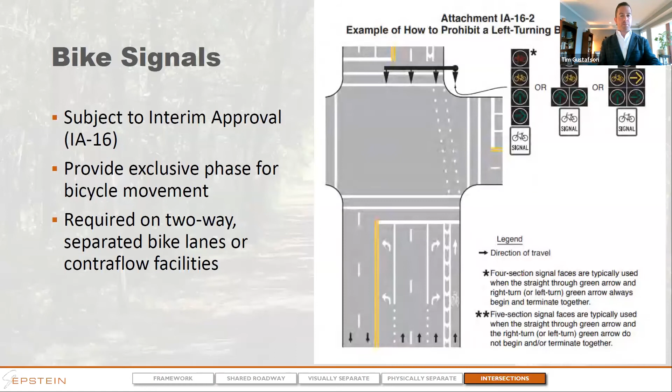I used to have a bunch of other examples in my presentation, but in the interest of time, I wanted to introduce it as a concept. We can always get into examples if that comes to mind.

If you have a traditional signal and want to make sure bikes can use it while going with traffic, there may still be a need to allow that bike to be detected by the signal if you're using actuated signals. Urban environments increasingly are moving to visual detection and or pre-timed signals, but if you still don't have that in your network and want detection, AASHTO gives guidance for how you can change your detector loops, where you place them in the pavement, and whether you want to put a pavement marking over the top of it to give that additional accommodation.

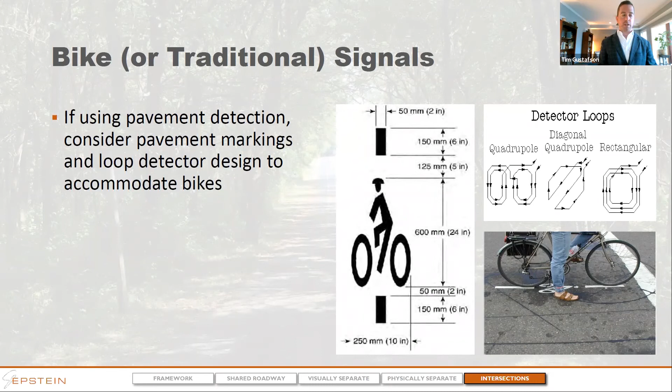I'll admit I haven't seen one of these added to any new projects in a while, but they still are out there, and here's the guidance you'd undertake to use them. I wanted to introduce that in case questions come up at the end of the discussion, but we can always come back to it if you're interested.

Can I add one thing before you move on to beacons? Sure. If you have a really heavily traveled road that is really a bikeway, you should consider your yellow and red timings at the signal as well, to accommodate bicyclist speed, not just vehicle speed. So just consider your signal timings when you're installing those.

That's a really good point, Cheryl. I didn't mention it, but since you brought it up, if you have your bike facility adjacent to your sidewalk and pedestrian crosswalk, more often than not your ped clearance time is going to dictate what happens at that intersection anyway. But Cheryl's correct that if you don't have that happening and you've got a bike facility where there's no ped movement, make sure your clearance time is adequate for the speed at which you expect a bicyclist to be traveling.

Now on to beacons. We're actually close to the end. Beacons and other crossing support are great because these are situations where we're not talking about intersections. I like to be very clear that a beacon is a traffic control device that's different than a signal, because when a beacon is dark, we treat it very differently than if a signal has gone dark. That's specific to not just Illinois, but a lot of state DOTs need to make that distinction so these things can be implemented in a uniform manner.

TRA 23 IDOT guidance that came out last year provides good guidance for the use of beacons and crossing support on multi-lane mid-block crossings, whether signalized or unsignalized mid-block movements. I haven't added that to my presentation just yet, but I need to mention that IDOT's done a really good job of adding that to clarify how this guidance is interpreted.

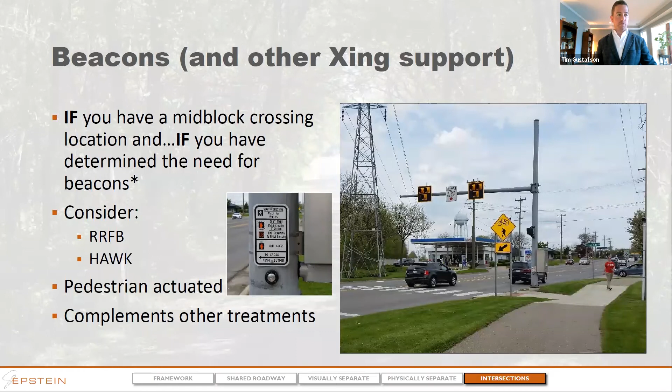They are pedestrian actuated and often will complement other treatments. As I mentioned, IDOT's TRA 23 guidance for the use of these types of treatments at unsignalized crossings comes in handy for how to go about that. And that other crossing support I'm mentioning is signage, obviously, so the use of regulatory signs, your yields and your stops.

There are modified smaller versions specifically for bike movements. And then there's a lot of yellow warning signage that also identifies these. I call these the W series.

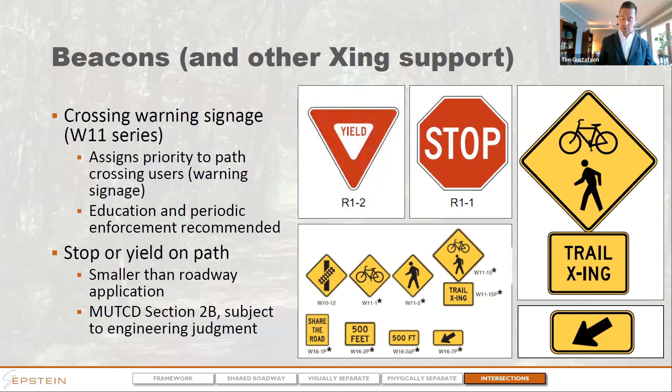The image on the far right, which is the bike-ped trail crossing with an arrow pointing at the crossing itself, is quickly becoming the most common assembly that we like to see at trail crossings. And then you'll see another one where the arrow has been replaced with a distance to the crossing, 500 feet in advance, so that motorists are given that guidance approaching a crossing so that they know a mid-block crossing is coming.

In addition to the regulatory signage and possibly the use of beacons and pavement markings, the angle at which a crossing occurs can also help and work in your favor if you think about how to use it. So as you're approaching a crossing, let's say we've got a rails-to-trails project that's crossing a roadway, chances are it would have done so at a skew, like you see here on the image showing what the alignment is suggesting. But what's actually happening is the path is being curved.

And so you look to AASHTO and say, well, what is my curve radius allowed to be based on the speed at which I'm approaching the intersection? You can make these rather slow. In fact, you might want to make them slow so that when the bicyclist reaches that roadway crossing, they're more inclined to press the push button to get the beacon to activate. They're more likely to look for a gap in traffic, and more likely to approach it so that everyone can see each other without darting across from someone's blind spot over their left shoulder. So you might want to provide this in a condition where you're supplementing all of your other treatments with this type of geometry. This is a geometric design, so there's not an MUTCD situation, but it accompanies everything else like I mentioned.

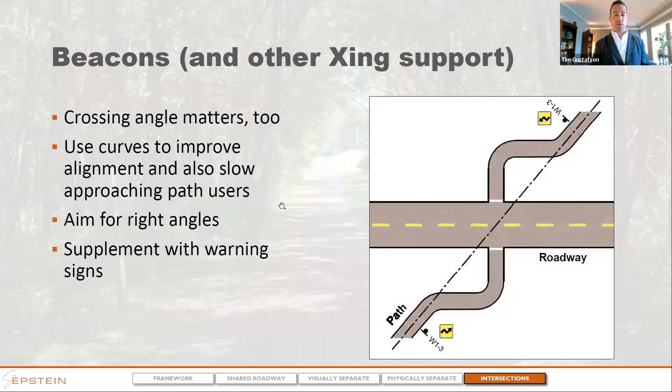Now, I talked about this way back in the traffic calming for bike boulevard section, but one of the things you can impose on your network if you want to add bike boulevards, and this is an intersection treatment per se, which is why it appears here, is this intersection mini traffic circle. These things are small. You can see that this curve is pretty low. It's got a minimum 15 -- I said 11 earlier, I meant to say 15 -- curb-to-circle width. And it's recommended in low speed, low volume environments.

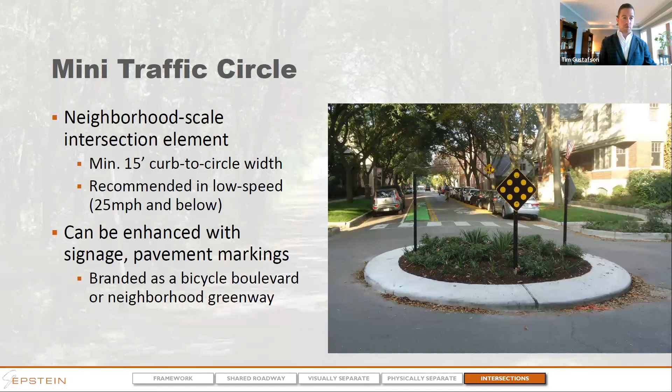Most of the city's neighborhood streets have been just universally reduced to 25 miles an hour. I've got these traffic circles outside my window, and they're enhanced with the occasional shared lane marking, a neighborhood greenway designation. These do a great job of imposing nothing else on your network other than making sure people aren't blowing stop signs and cutting corners and speeding through your neighborhood greenway, but in fact is something more comfortable for bicycling. And then the last item that I have is the use of the roundabout.

Again, we don't see a lot of these, at least in the Decatur example, but you have seen them used elsewhere. And there's two options for a bike facility entering a roundabout. The first option is you can do a bike lane drop and encourage the bicyclist to circulate the roundabout with traffic, especially if your speeds and volumes are low. There's no reason you wouldn't be able to, as long as you're comfortable that everybody's entering at that same speed and volume.

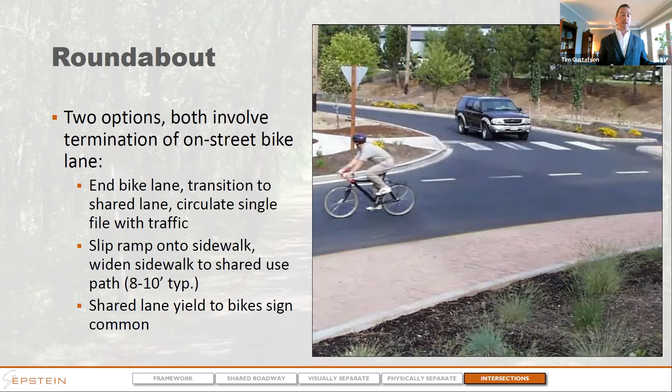If that's not enough, or you want to provide an option in addition to it, you can provide a slip ramp up onto the sidewalk, widen that sidewalk to 8 to 10 feet around the outside of the roundabout, and then use the shared lane yield-to-bike sign, providing the ability for them to get back into the bike lane after they've completed their movement. You've given them an option either way, either on-street or as a side path sidewalk solution. So that's kind of the flexibility we offer from the roundabout.

And I was lying when I said we were done, because there is a median refuge island guidance in here. This is another enhancement. The relevant guidance points to this, as well as other guidance, that if you want to split your crossing into two smaller movements for a pedestrian, so they only need to look at a gap in one direction of traffic at a time. This also provides you with just a little bit of refuge, hence the name, where you've imposed a barrier curb.

I really recommend a curb, not just paint, providing that space needs to be at least 6 feet wide. As I mentioned, ITE guidance gives you a recommendation based on the number of lanes, the posted speed, and the average daily traffic on whether or not you need to add a median refuge and a beacon, or if a median refuge plus signage is enough. But these do a good job of helping to calm traffic, visually narrow the roadway, split the crossing into more than one group, and generally just improve conditions at these locations if you're trying to improve a crossing.